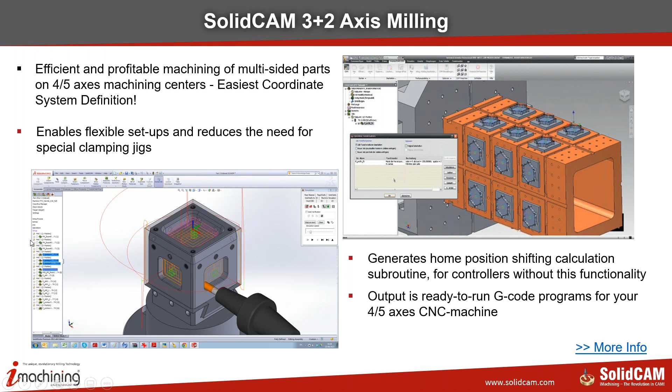So let's look at the first output type, the 3D coordinate rotation.

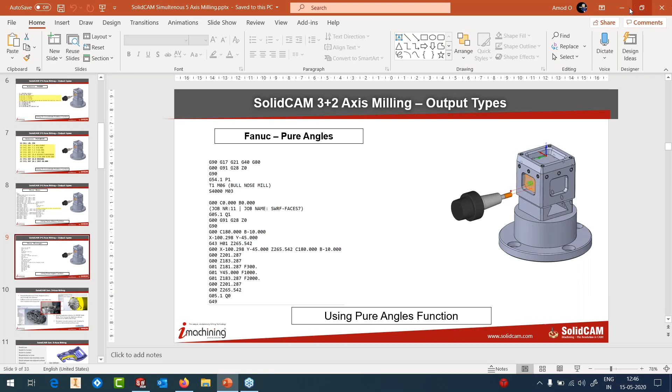So this is a pure angles function. What I will do is move away from my software, from my presentation, and go into the product.

I think I clicked something else and it would come up now. Yes. Let me just let that be there.

So I have a part, and the first function that we're going to see is for Fanuc. I have called in a Mazak Variaxis i500, which is a table kind of machine, and it has got its own Mazatrol control, which is highly compatible with Mitsubishi and Fanuc kind of programming. So it's going to be very similar to Fanuc.

So I would now like to create some programs here, which are basically from different sides, and I would like to post-process and check the output. I'm going to use the same part and show you the difference between moving from Fanuc to Siemens to Heidenhain to macro to pure angles.

And I'll also show you how to check your part program, especially in the pure angles function, where you don't know how the machine is going to move, how to check that right away into your system and confidently give the program down to the machine.

So I'm going to use my drag and drop templates. I have got some facing templates here, and since I would like to do some facing programs, I want to apply some facing templates. So I'll use a simple drag and drop.

I have a 3+2 with a 32 face mill. This program was already done on some other part. I just saved that particular program as a template. I'm just going to drag this and drop it on the face here, and I get the program.

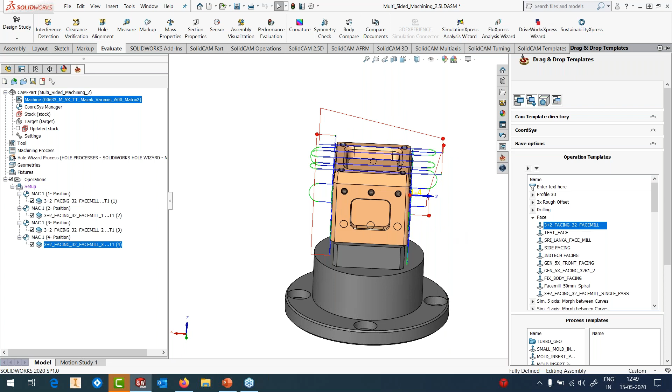Now we'll also look very quickly at some other areas. For example, I want to machine this chamfer. Since I'm using a big tool, I just want a single pass, so I have got another template for single pass. I just drag and drop it on the chamfered face. You can see the coordinate system is already created, and it just creates a single pass to machine the chamfer.

Fair enough. These were to be calculated. Let's calculate.

Okay, so I have my program. If I now output the first program, which is basically nothing but a simple pure 3-axis kind of program where it's not going to do any tilting, you can see that I don't get any G68.2 function because it doesn't need it. It's a simple 3-axis XY plane machining program.

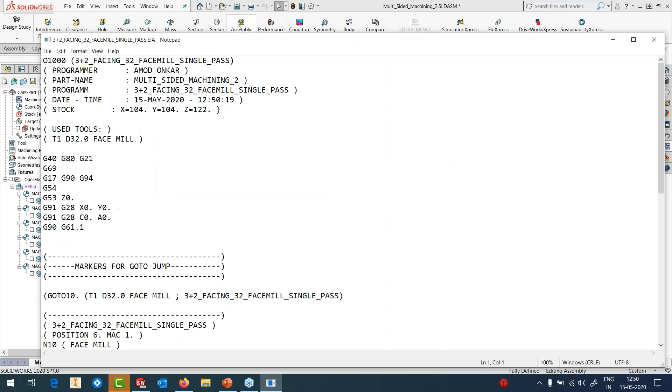But if I take the next one, the single pass program, and generate a G code out of this, you'll see that it outputs the G68.2 function where it'll output P1, Q123, basically the rotation priority: X first, Y next, Z next. Then the X, Y, and Z.

These are basically my coordinate system shifts. How do I get my coordinate system shifts? I simply go into my coordinate system and click on inquire. And if I go into my translation, you can see it is shifting by X minus 54.09, Y 0, and Z minus 38.196. That is the position where the coordinate system is with reference to the main coordinate system. So if I look at the program, I get those 3 coordinates.

So basically, I'm telling Fanuc, or the controller, move first to this position and then rotate around X-axis by minus 80 degrees, Y-axis by 0 degrees, and around Z by 90 degrees. Once it does that, it achieves the position needed to machine it, and then G53.1 will rotate the tables, both in A and C or B and C, whatever those axes are. It will rotate the table and run the program. Okay, fair enough.

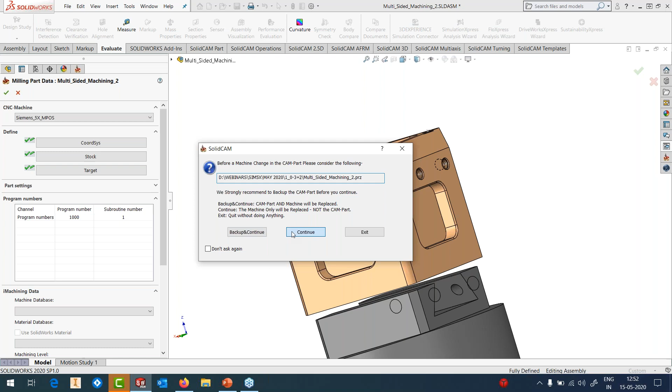Let's change the controller. From Fanuc, I'm going to keep all the programs the same. I'm going to move to Siemens 840D. So I'll go to Siemens. Done. And the same single pass program, I'm going to generate the G code.

So instead of G68.2 or anything else, I'm getting cycle 800. Now cycle 800 has 16 variants, out of which 14 are must-define variants and 2 are optional. You could define them or not, because they can be taken as defaults. And each variant has its own special place. For example, like I said, 54.090 and minus 38.196, you can see those 3 values coming up.

And then we have a number, 27, and we have got 54. So basically these numbers tell you the priority of rotation. If you go to the Siemens manual, you will know that one particular number will be ZYX, another will be XYZ, another will be YXZ. So the priority of rotation is defined by these angles.

Okay, so this is about Siemens. So we get an output like this for Siemens.

Let's go to Heidenhain. I'll change it to Heidenhain. Let's take the DMU 65 monoBLOCK with ITNC 530. Now the window that came up was basically telling me that the cycles between Siemens and Heidenhain are not the same, so please map the cycles.

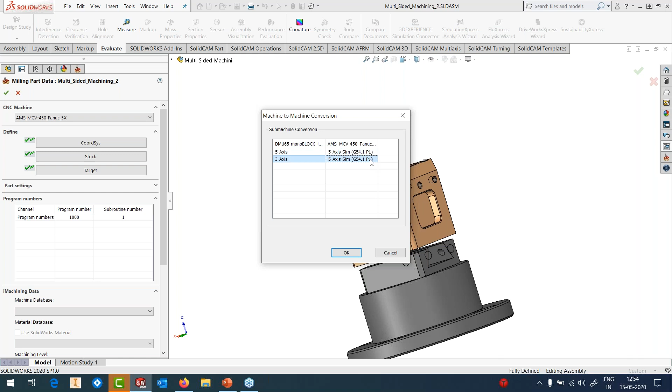So let's look at a macro function. Let's load an AMS machine. This is with Fanuc. Say okay, continue. Okay, 5-axis is basically G54, and this one is G65. So I'm going to change the submachine to indexing.

Before I go into the generation of G code, there are two files that get generated. One is the main file, which has got the program as well as the macro call. The other is basically the macro calculation itself. The macro calculation need not be output every time from the software, because you just take the macro calculation once for that particular machine, put it into the memory of Fanuc, not anywhere else, into the memory. It has to reside into the memory. And once it is inside the memory, you need not output that macro call again and again for different parts. It stays there forever unless you change the machine. Okay, so I'm going to output the macro for the first time.

Okay, and the same single pass program, I'll generate the G code now with a Fanuc output. So you see that you're getting two programs here.

Let me explain these programs to you because they're pretty interesting. First of all, this is my main program, wherein it calls, using the G65 function, it calls P8889. The P8889 is basically the same 8889 macro call calculation. Here I output to the controller the X, Y, Z positions, the changed positions, basically the shift of the origin. And I also output the B and C angles to the controller.

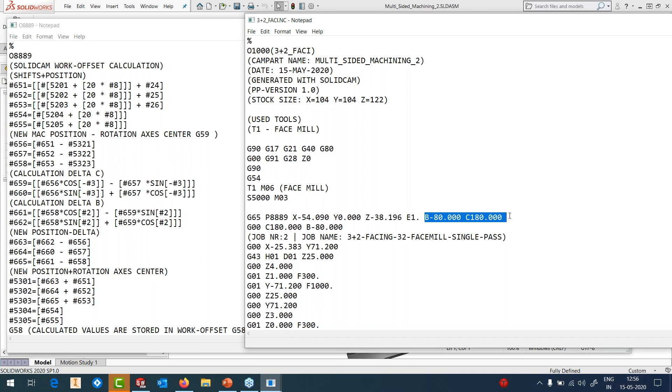But this is not enough. Just shifting the origin and rotating the B and C angles are not enough. I also need to move the origin physically inside the controller. To do that, I use the macro call function. The macro function is basically a combination of several mathematical trigonometric functions, which will use cos and sine methods to generate the new shift and the new coordinate system, which is going to be our new G58, every time we call the program.

So let's close the programs. Let's say 1, 2, and 3. If I output these three programs together and generate the G code, I'll get only one macro call. I don't need that, but here I can see that for the first toolpath there is one macro call. I go down, and for the second toolpath there's another macro call, because here it's going back to the home position, resetting everything, and then recalling the macro again.

Once this program is executed, it again goes back to the home position, resets everything, and calls the macro again for the next program. So every time there is a change in your coordinate or a plane, basically you go from one plane to another, a new macro is called again, and a new G58 is set, and the programs will always be executed from that particular new G58.

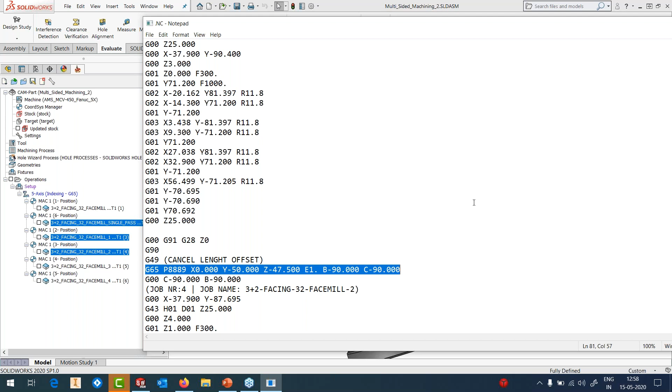But looking at the program, sometimes the operator's eyes will start rolling around because they find it very difficult to comprehend, unless the operator himself has been trained on the macro. They dislike the macro functions. So in such cases, we have to change our programming method, and we need to go into what we call the pure angle method.

So I simply switch the sub machine inside the machine itself, and I go from a macro method to a pure angles method. Now what I'm going to do is I have entered the part position. So I have got my G54 here, and my G54.1 P1 will be exactly at the center of this bore, because that's the mating part on my table.

Okay, so I go to the machine, I set G54.1, I mount the fixture and the part, set my G54, and I get two coordinates, XYZ, XYZ. And I do a subtraction, and I find the difference between G54 and G54.1, both in X, Y, and Z. And those values I come back into SolidCAM and enter here.

Because remember, the controller is not going to do any kind of calculations. The calculations will happen by SolidCAM. So I bring the values, I put the values here. If you want, you can just look at where the part is going to be stationed at. Not in this case.

Once these values are done, say okay, let's generate the G code. Now this is going to be generated not with reference to G54 — sorry, macro is not needed here — but it is going to be called with reference to G54.1 P1. So all my coordinates are now going to come with G54.1 P1.

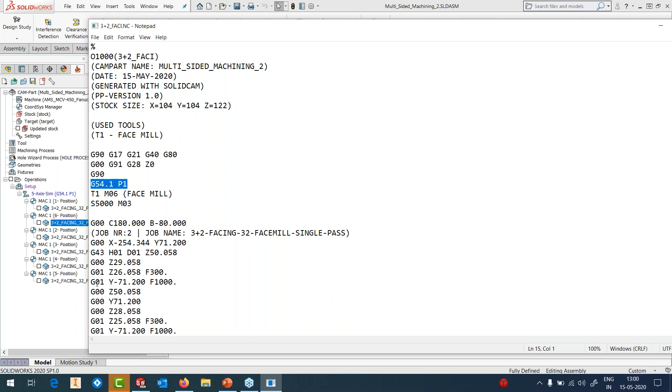So you can look at the values. The values look crazy, but the operator can visualize it very easily. So what we will now do is we'll go into the machine simulation and we'll check if our G code with respect to the machine is okay or not. You don't even need to go take it to the machine and then get some surprises. It's not needed. You can check it 100% here itself.

Now, before we take it into the machine simulation, I would like to note down one value here. Go to the tool, and I will note down my gauge length, which is basically the tool gauge length, 122. Okay, so let's go into the machine simulation.

This is on an AMS machine, and you can see that it's ready. If I run the simulation, this is how it's going to run - one pass, second pass, done.

Okay, so let's go back. Now we are ready here. Let me look on the side here. I get a coordinate of X, Y, and Z, the B angle, the C angle, and the B angle. Now this X, Y, and Z are basically the machine coordinates, not the coordinates coming from G54, but these are machine values.

So I now need to verify if these machine values are the same as my G code values. What is my X value here? It's minus 254.344. My Y value is 71.20. First, let's check if we are getting the two X and Y values same - okay, so we have minus 254.344 and Y 71.200. I can now be 100% sure that my X and Y values are absolutely right. It's going to come to that position.

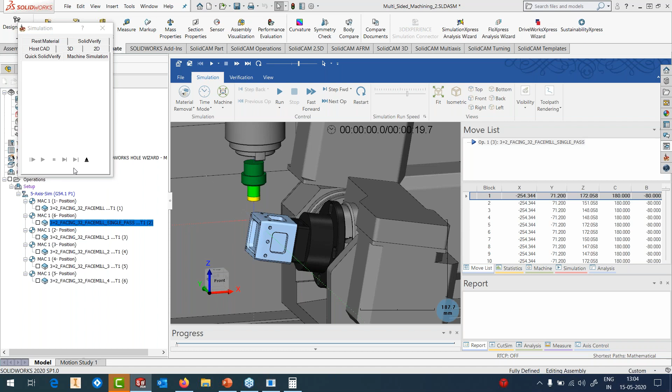We have got a special training course only for this 3+2, especially for pure angles. Someday we could have just a session for this particular topic, because it's pretty interesting. There are several machines today in India that do not have the 3D coordinate rotation functions, neither do they use the macros, so the only way we go here is with the pure angle method. Many of my customers are using this method successfully. They don't look left, right - they just take the program down on the machine and run it.

Right, so that was about 3+2. We saw some 3D coordinate rotation functions, the macro function, and the pure angle functions, including checking the machine. Let's get back to our presentation and move ahead. We're now moving into simultaneous 5-axis, which is basically the generic functions. It's a very powerful simultaneous 5-axis system that generates very powerful simultaneous 5-axis toolpaths with a very user-friendly interface.

You'll see that it's very, very easy. Collision check and avoidance for tool holder and other machine tool components are provided within the software. Apart from that, we have specific application solutions for swarf, multi-blade port, contour, multi-axis drilling, conversion of 3-axis to 5-axis, etc. And we can simulate the entire machine tool, including the material removal simulation, showing both the rotational and linear axis.

Now, one word about generic 5-axis - generic 5-axis is a vast system. You will see that it's a very vast system, and there are no parts that cannot be done on generic 5-axis. Everything is possible. Only thing, because it's not an automated function, it could take some time to get adapted to a new part.

But apart from that, it can machine any part, whether it's a port, whether it's an impeller, whether it's a blade, whether it's a part, whether it's a drill, anything. You throw anything at the generic 5-axis and it could do it very efficiently. Okay. Generic 5-axis basically has 3 components to it.

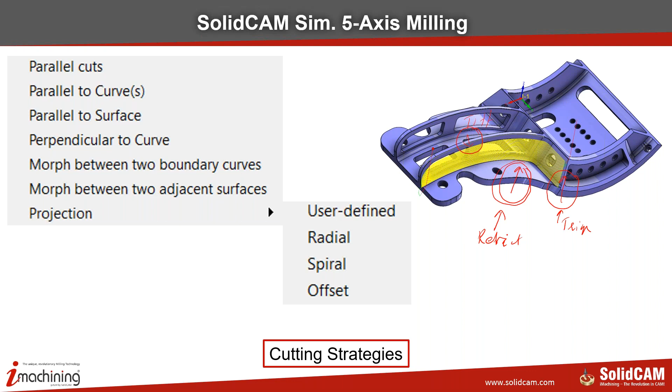For example, for this particular surface group, I could say just tilt the tool. To this particular group of surfaces, I could say just trim the tool path, trim the collisions. And to this particular group of surfaces, I could say retract the tool up. So in just one small part, I have now defined 3 reactions, okay? It's not just, you select a surface and say gouge check. The software needs to know what to do if it finds a collision. That's what we call reactions. Tilting to one group, trimming of the tool path to the other group, and retracting from another group. So you can put in SolidCAM 4 such groups of surfaces and 4 reactions to these surfaces.

So our way of working in SolidCAM is that we first define the strategy, we define the tool axis control, we define the gouge check, and we calculate the tool path. So this is a simple streamline. Now, this is a flow of the way we generate the tool path.

Like I said, generic 5-axis is very vast, and so is the support of the tools that we have. We've got end mills support, bull nose, ball nose, face mills, dovetail mills, taper mills, flat taper mills, taper ball nose, slot mills, lollipop, and the new generation tools like barrels, oval form, lens form, and taper barrel or taper form tool path tools.

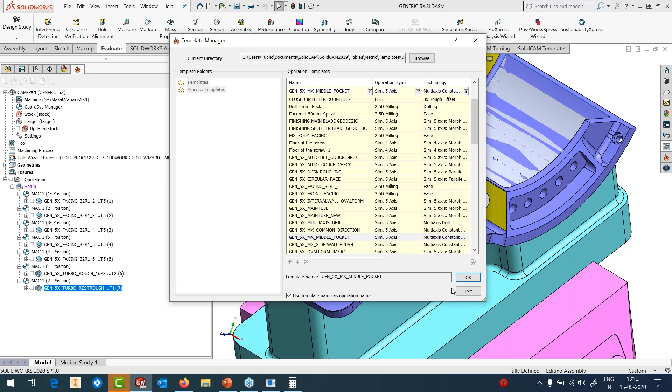The first one I would like to look at is machining the inside walls, which is pretty straightforward. So what I'll do is add from a template. Even here I've selected and kept a lot of templates. Let's see, that's the middle pocket, and I'll save the template.

So what I'm using here is a strategy called MultiAxis constant step over, which generates constant step over irrespective of how the surface is. Not by looking from one particular direction, but generating a constant step over looking normal to the surface at every given point. So in the geometry, I need to pick surfaces.

So I'll pick my surface. I'll pick this one, this one, this one, this one, and this one. These are the 5 surfaces that I picked. Now notice that these surfaces have cutouts in between. So I'll also show you how we handle these cutouts very easily.

And I'm going to use parallel to curve. So I'm going to use that curve at the bottom. Yep, that's the curve I'll use. And the tool I'm using here is a 10 diameter ball nose.

And in the tool axis control, I have defined a tilt of 80 degrees. That means it's going to tilt 10 degrees away from the surface. It's needed because I don't want it to touch the entire flute onto the tool. That could also be a method of doing it, but that's a different method. I'm going to give a tilt of 10 degrees basically to the vertical, so I've defined 80 degrees to the horizontal.

And in my geometry here, in the surface, I have asked the software to fill the holes. So if there are holes within the surface, they will be filled up and it will be machined. Okay, so let's save this toolpath.

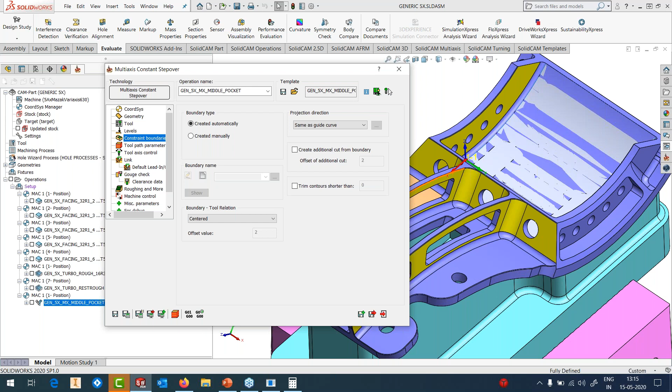Most of the calculations inside SolidCAM in 5-axis are not lengthy calculations unless we used a specific calculation routine. Most of them vary anywhere between 15 seconds to 35 to 40 seconds of calculation time. So they're pretty quick. So if you look at the toolpath, okay, so we have a problem now.

You can see that the toolpath has been done very funnily. That's because of my tool axis control. Instead of plus 80, now it's coming down from the bottom side—since I've just defined surface, it can approach from any side because it's 5-axis. So I'll say minus 80, and I'll hit calculation.

Again, like I said, most of the calculations inside SolidCAM are not more than 15 to 40 seconds. Okay, so we've done a pretty neat calculation. You can look at the toolpath, very clean. And most important, you can see that it covered the surfaces. It covered the holes that were there in the surface and just bypassed them, moved over them as if there was a surface over them.

If I look at the simulation now here, simple insight within the software—let's run the simulation. And if I look now at the machine simulation, if I take it to the machine simulation, okay, I've loaded it on a Mazak. And that's my part with the fixture on the table. And if I switch on the toolpath, that's the toolpath.

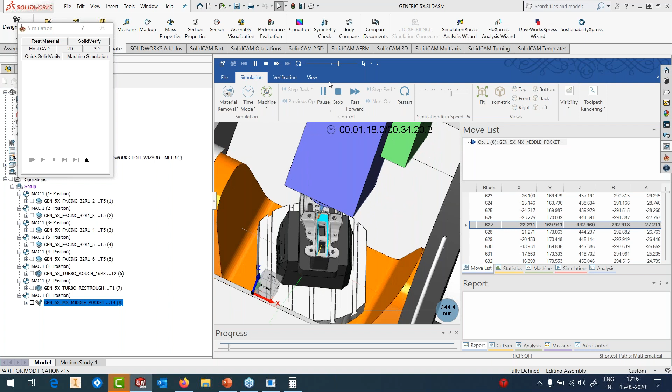Start. That's how it will machine it. Okay, so it's pretty clean, pretty fast generation, and most important, the toolpath quality is extremely high. Okay, fair enough. This was one toolpath.

Let's also now generate the toolpath for one of the side surfaces and look how it machines. So I'll again add from the template the sidewall finish. Okay, I'll select the faces a bit later. Once I add the template, let me move to my surfaces, and I'll pick my surface here, and the drive curve is there. That's the drive curve. Okay, this is done.

The tool is, again, 10 diameter in this case. Tool axis control, won't use minus, it's going to be plus here. Well, that's it. And in the gouge check, I'm going to enable only with the tool shaft and the cutting portion. It needs to check for these surfaces that I just picked. And the strategy here I'm going to use is Retract Tool along tool axis. Perfect. Let's hit the calculation. Like I said again, calculation time isn't too much.

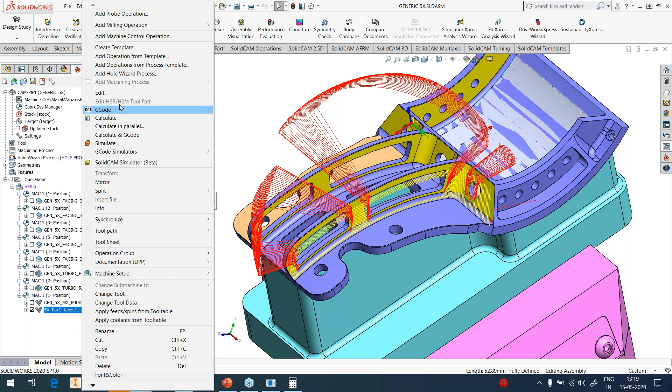You can see there are so many red patches. Okay, that's pretty much expected because it found holes and it doesn't know what to do with the holes. Because when I go into my links, the holes are simply meant to be retracted to the clearance plane. So if there's a gap more than 20% of the size of the diameter of the tool, it should retract to the clearance plane. I don't want to do that. I just want to apply a blend spline. Okay, don't go to the clearance plane, but just blend between the 2 positions. Let's hit the calculate button. Done. And you can see that I fixed that area.

Right. Now we have a problem here of retracts going too much at the end. That's because, again, if I go into my links, you see that when it is connecting 2 slices, anything more than 110% of the side step, it will take it to the clearance plane. I don't want that. I will just change the value to 500. And the ones that are being directly connected, just straight connections, I would like to change them to spline so that there are very smooth connections on the slices. Okay, so that's also fixed.

You can see how easy it is to fix issues once you see them in SolidCAM. Okay, so we fixed the issue of the gaps that were there. We fixed also the issue of these sharp corners, sharp motions. I now generated a smooth motion. Okay, so we machined this particular face. Now we have to machine the fillet. That also is pretty simple. Now to do that, I'll have to use a different kind of technique. And this is a technique where we use the functions of SolidWorks.

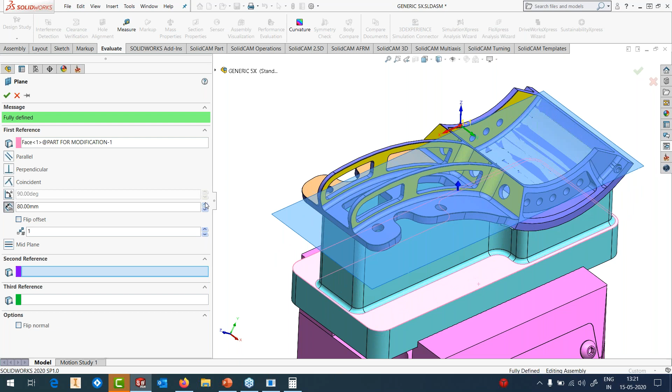So I'm going to make a plane here because I just want to make a sketch. Okay, that's good enough. And 80 is good enough. And we'll make a sketch here. Let's go to the top view. And I will simply make 2 lines. 1 line here. And 1 more line here. Now to make the line exactly the same, I'll drop another construction line here. This is only going to be used for construction, and I'll trim off the excess.

And I'll apply a fillet here, 10 millimeters. It's good enough. So I've got a curve. This curve should be good enough for me. So I made a sketch of a simple curve. Now I'm going to add simultaneous 5-axis again into the generic. Let's go to the geometry. I'll pick the geometry. These are the fillets that I need to machine. And okay, it's morphed between two curves.

Let's go to the start. That's my first curve, and my next curve is here. That's all - so I have two curves, start and end, and I'm going to use a taper ball nose in this case because I would like to machine it.

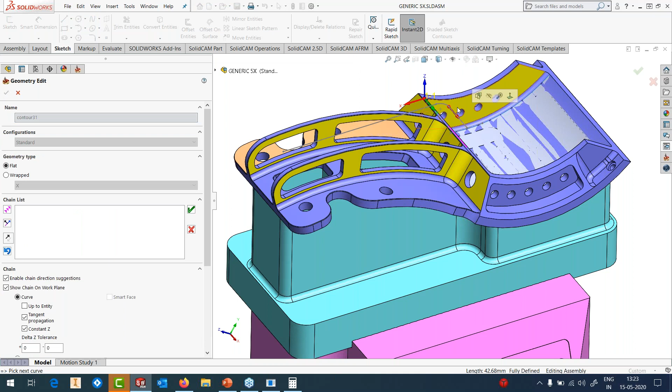Like I said, we have got tons of methods. So we will say tilted through curve, and the curve that we're going to pick is the one that I just defined using the sketch - this one here. So I picked this curve. That's the curve that I'm going to ask my software to follow whenever it's cutting the surface below.

Okay, perfect, so we have almost done that. Let's save and hit the calculate button. Again, this is going to be a pretty quick calculation. Okay, calculation done - we have got a lot of retracts.

We don't need that, so let's edit this toolpath, go to the links. Of course, we can always fix it, but I just want to show you that you can always go back and change this value. We could always have set this value straight away in the toolpath itself.

Okay, that's done. So if I now run the simulation of this, I'm machining only the fillets. You can see it's clearing that surface, machining the fillet, and the tool axis is always passing through this particular curve that we selected. So we used a tool axis, a tool curve function. The curve was selected, and the tool axis now is always passing only through that curve.

So, like I said, in SolidCAM, in the generic, you have got tons of methods in which we can machine a part the way we want it, not the way the software is going to give us, but the way we want it to machine.

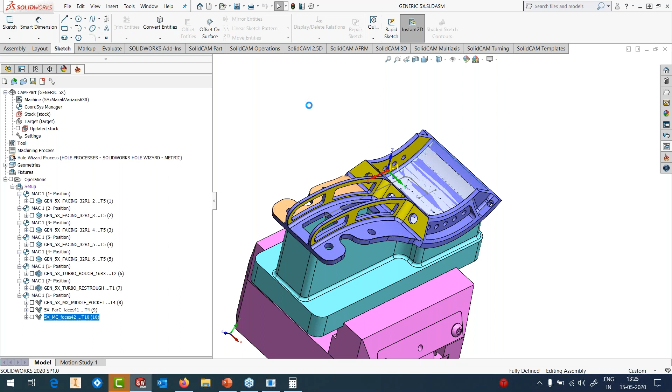Right, so let's pick another part. I'm going to take another part and show you the generic 5-axis machining functionality. And this time it's going to be a turbine blade. I've got a pretty - it's not a simple turbine blade, by the way. It's a complex turbine blade.

We've got features on either side, fillets on either side, and surfaces on either side. We would not like to see the roughing, because most of the time the turbine blade roughing is done using 3+2 - that's simple 3-axis roughing, with positioning in the other 2 axes. We would like to see the finishing.

Okay, so again here I have got templates. So I'm going to add operation from a template, and I've got turbine blade, main finishing toolpath. I'll apply it - it's purely parameters, nothing else.

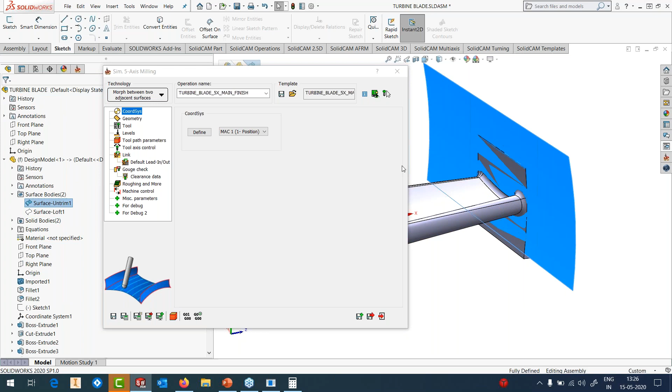The geometry I'll have to select. Now what I've done here is, just for the sake of clarity, I've untrimmed this face. I'm just going to use this face to define the pattern, nothing else.

Okay, my drive surface is going to be these surfaces. I'm not going to select the fillets - the fillets will be machined separately along with the wall. Okay, so these are my drive surfaces. That's done.

My start edge - that's why I brought the surface out from the hidden side. So this is my start surface, and this is my end surface. Okay, the pattern is now going to be between these 2 surfaces.

Okay, the tool here I'm using is a taper ball nose. Many people would immediately jump on this and say, oh no, for turbine blades you must use bull nose. I'm going to come to bull nose also, but I would like to show you the power of SolidCAM, in which it can just switch over between tools and give you an excellent toolpath straight away.

Okay, so in the toolpath parameters, everything is done. Only thing now, the function of that face is over - I'm going to switch it off, and let's go to the gouge check.

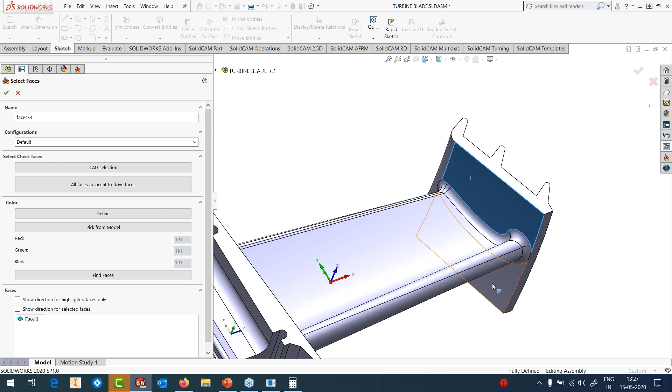And here I'm going to enable the check surface. Basically, the check surfaces are these surfaces where I would like the tool and the holder also to tilt if they get too close, or if they get precariously close to these surfaces.

Okay, this is done. And the second gouge check that I've put is for the drive surface, wherein I've said retract the tool along the tool axis if you find any collision with the drive surface. With the first gouge check, I said tilt; second, retract. Okay, that's all that's needed.

And let's hit the calculate button. Again, it's not going to take more than 30 to 40 seconds to calculate this.

Remember, this is a time-tested template, so you can use it for any kind of turbine blade that you have. Just take a template, apply it, and your calculations will be done.

Like I said, any tool path takes not more than 30, 40 seconds. Okay, that's the tool path here. Pretty clean. Look at the tool path. It's a pretty clean tool path that you have in SolidCAM.

Okay, let's look how this looks on the machine. So here I have a DMG DMU 100 monoblock, and this monoblock machine is different. It has a head motion, and it also has a table motion, but the table is mounted horizontally, not vertically. So this is the part mounted on the table with the tool, everything, and we can start the cutting motion.

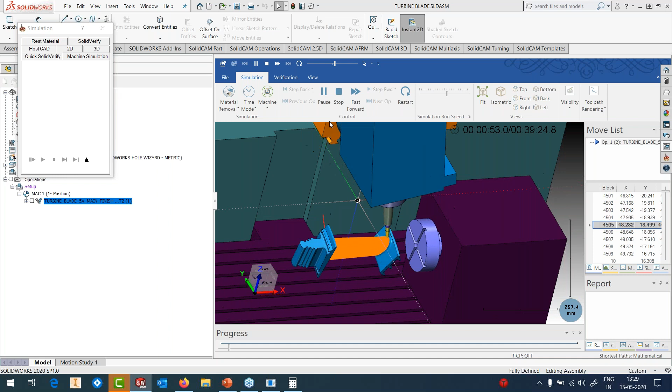Smooth motions without any collisions. Okay, so it will just keep rolling around and keep machining it like it has to with a turbine function. There's no point in looking at the simulation till the end, because honestly, I find it boring after some time. What we need to check is only the first and the last motions. Once they are okay, everything else in between is fine.

Like I said, some people would have jumped up and said, nobody uses ball nose for finishing your part. How would you do it with a bull nose? Fair enough. So let's again bring a template. I've saved a template with a bull nose. I'll apply that.

And again, I can reuse the geometry, but I don't want to do that. I'm going to define fresh new geometry here. My drive geometry is this. Like I said, please don't look at the fillets because we are not going to do the fillets now. Fillets will be the next step. So these are my drive surfaces again. And my start edge surface is that one. And my end edge surface here is this one here. Okay, again, this work is over.

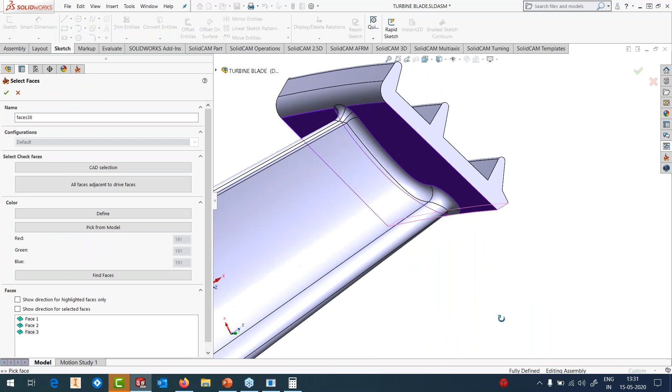I'll say bye-bye to him. And in the gouge check, we will use again the check surface, which is basically 1, 2, 3. I also would like to pick all these surfaces because these surfaces are going to be precariously close to my holder, not to my tool, but to my holder and the surface here.

Okay, done. Now, the only thing I've changed in the tool axis control, the other one was always normal, looking normal to the surface. But here I have applied a lag angle of 30 degrees to this particular operation. I'll tell you why I have applied a lag angle, okay? And this is very important when you're using a bullnose tool. So let me save this. And let's calculate this tool path.

Somebody is asking me if we have to make each machine in 3D before creating the program. No, these machines are supplied to you as part of the software. When you order the software, you have to tell us which machines you have. We build those machines for you, and it's only done once. When you call the post processor, the machine comes along with it, so you don't need to keep redoing it. It's only done once when we install the software for the very first time on your computer, not when you do the programming. Okay, it's just once, right?

So we have done our calculation. Now with a bull nose, what was the tool I used here? I used a 16 with a corner radius 3. So I'm using an inserted kind of a cutter with bull nose 16R3.

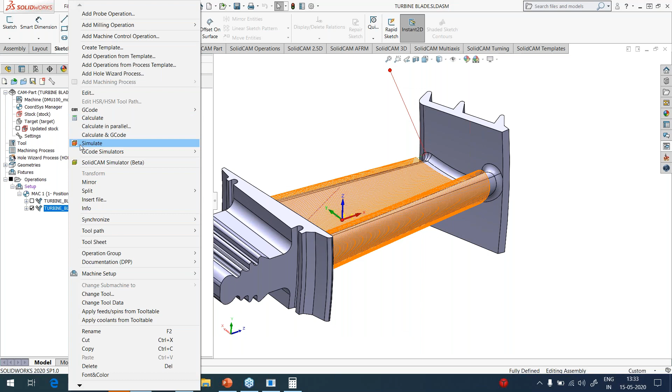Let's run the simulation in the machine, because I would like to explain to you what happens when I provide the lag angle of 30 degrees. Now, why people don't like to use ball nose tools for finishing, especially on turbine blades, is that most of the times the tip of the tool is in contact with the surface. And we know that when the tip is in contact, the RPM is close to 0, or even when the other small portion is in contact, the RPM is very low there. So the quality of surface that comes is not very good with a ball nose tool. However, it's not the case with bull nose. Now, why I have given the lag angle, I'll explain to you when it comes onto the surface here.

Okay, that's a bull nose. I'm going to stop it here, switch off the tool path, and let's look at the contact of the bull nose. You can see where it's making contact, on the front of the tool. If I had not given the lag angle, the contact would have happened at the center of the tool, which is not the right place to be using for a bull nose tool.

Especially if you're cutting in a concave kind of area, you should never use the center portion of the tool. Here we're using the front of the tool, always in contact. Whenever it is cutting, only the front of the tool is in contact with the part.

The advantage here is that you get the full diameter contact area, you get the entire RPM. So you get much better cutting, much better surface quality, and you can cut much faster.

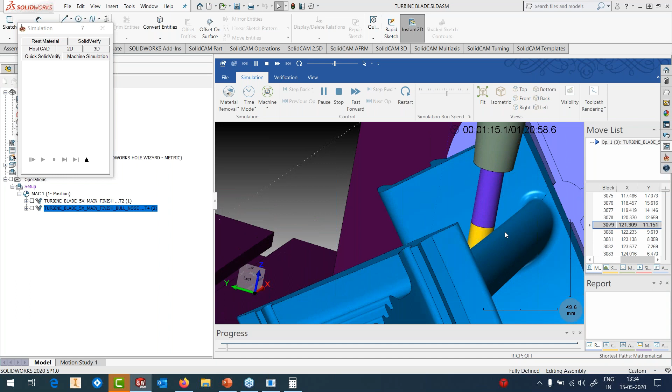Remember, with a taper ball nose, it's not possible to go with a bigger step over. With a bull nose, you can actually go with a bigger step over and yet generate a similar surface quality that you would have generated with a ball nose with a small step over.

Somebody is asking that lens tools are very good for such functions. Yes, we will come to the lens tools when I show you the circle end mills in approximately five minutes from now. Okay, this is about bull nose. It'll keep continuing and machining it.

Let's now look and quickly generate for one of the sides, for one of the fillets, we will generate the program, because the other side is very similar. So I'll again add the operation from the template, and this time I've got a turbine blade finish, fillet finish. I'll add it.

Here, of course, we cannot use bull nose. We can at most use a ball nose or a taper ball nose. So I'm using a taper ball nose with diameter 16 and tip radius 3R.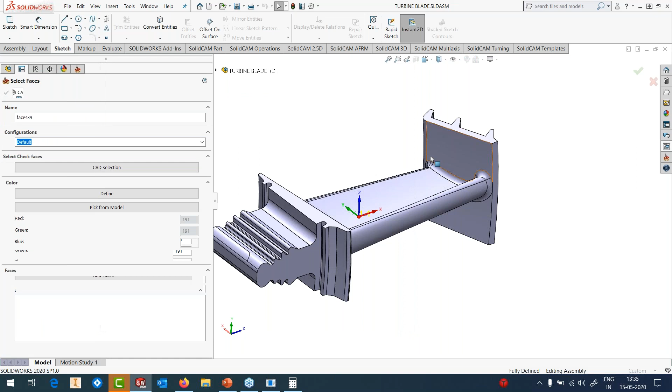Geometry, of course, is going to be -- because I'm going to take some portion of the tool path also onto this, so that I don't get any mismatch between the bull nose generated tool path and this one. There has to be some kind of an overlap.

So I'm going to pick the surfaces. Okay, that's done. And the edge curve, it's basically this one, like that, here. It's going to go parallel to the curve. Oops, no. That one, here, yeah, okay, that's done.

I don't need to do anything much, but I'll just go to gouge check, and I'm retracting the tool if it finds collision on the drive surface, also the check surface. What is my check surface? My check surface are these three surfaces, because the fillet is in contact and it could come very close to the surface.

Okay, let's save it and hit the calculate button. There's nothing else. I have saved.

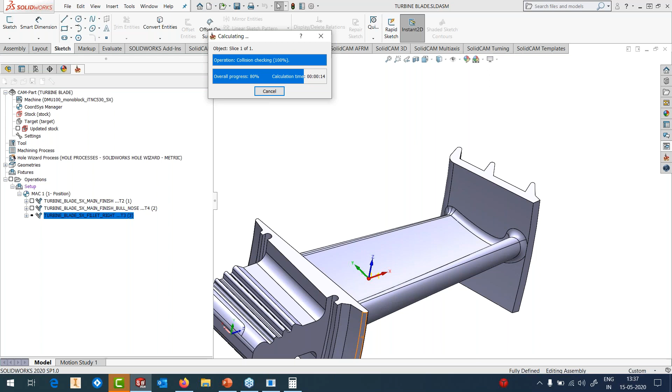The most important part is the creating of proper templates. By creating templates, you actually end up standardizing your toolpath generation. So a senior most person can put all his experience generated over the last several years into effective templates, and the engineers below him only have to just apply the template and select the right geometry.

Okay, the toolpath is done. Again, looks nice and clean. If you look at the simulation this time, what I've done -- you can see here, I'm using a 4+1.

I have locked my -- if I show you the toolpath parameters, the tool axis, you can see it's the 4th axis. That means I'm going to have simultaneous 4th axis motion, and the 5th axis is locked at -30 degrees. So that's not going to change. The 5th axis is locked.

I'll just right click on this. Let's go into the simulation of the machine.

Michael, you're asking whether templates can be made as a part of the standard installation. That's a good suggestion, it can be made. I can provide all the templates that I've generated over the last few years, and this could be a part of our installation. Thank you very much for the suggestion.

Let's run the simulation, and you can see here what is happening. If I go into the front view, my head is locked at 30 degrees.

So if I look at the side bar here and look at the B angle, you can see the B angle is set at -30. It's not changing from -30. The only thing that are moving are the X, Y, Z, and the A axis. By doing this, it's actually going to machine a portion of the top flat surface and also the fillets.

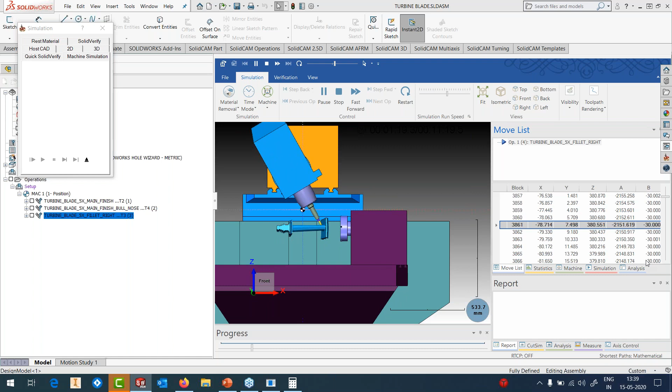I've got templates also to machine the left side of the fillet, and templates to machine the face of the turbine blade. I created these templates over the last year for the turbine. I would not call it several years, but I did apply it to at least 3 or 4 different types of geometries, and they work very well. It might need a little bit of tinkering here and there, especially on real complex geometries, but otherwise they work perfectly fine.

That's about the turbine. We moved from a simple geometry into turbine, which is a complex geometry. We'll move to an even more complex geometry. When I look at the generic 5-axis, for me the most complex part is going to be this, because honestly, nothing is visible. Everything is hidden inside. So we have what we call a closed impeller.

We are going to machine the closed impeller. I already have done it, because for people who would like to know how this part was actually done from scratch, right from importing the part into the software till the end, please go to our webinar section on solidcam.com. Hopefully you should be registered there to look at this webinar, and there you have a webinar of almost 2 hours only for this part, where I have taken this part and imported it via Parasolid.

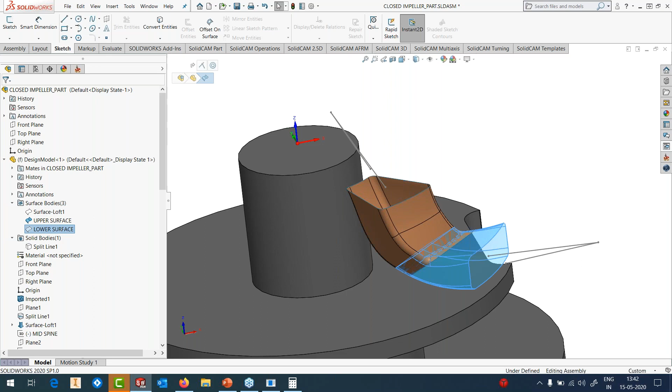This portion we are going to machine from one side, and the other side, which basically overlaps sufficiently, I call the lower side. You can see that it overlaps almost 10-15 millimeters into the upper surface. So I created this surface, and these I called the lower surfaces, and I'm going to machine it in a different direction. Then I created another toolpath which basically overlaps between these 2 toolpaths, one coming from the top, one coming from the side. It just overlaps to make sure there are no mismatch marks between these 2 toolpaths.

So this is all I've done with this particular part. But like I said, this entire exercise of creating this is approximately 2 hours, so I can't spend 2 hours today because we have a lot to cover. What I have here is the upper surface. If I go into my first toolpath here, I'll quickly show you what items I've selected.

It's morph between two boundary curves, and these are the surfaces that I've selected as part of my machining surfaces. My upper curve is my start curve for pattern generation, my lower curve for pattern generation, and then I have the tool axis control, which is basically a tilt curve. These tilt curves were created using some functions - why they were created like this is available in my webinar from a few weeks ago. This is the tilt curve I've used to control the tool axis, and some gouge check faces that I selected.

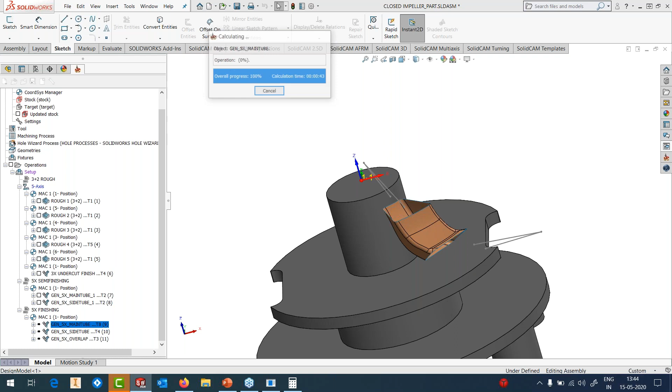Apart from that, everything else is only applying the final collision checks, and like I said, not more than 30 to 40 seconds, we have the toolpath. So we have a very nice toolpath in the area.

Let's run the simulation in machine. This time I have a DMU 65 monoblock. This part is quite big, approximately 300 plus in diameter.

Okay, so this is the part and the toolpath. Toolpath is not visible — I can make it visible, but I don't want to do that. Let's start.

That's how it will start machining. Let's increase the speed. I've used a lollipop tool to cut this part, and this will just keep circling, spiraling till it reaches the end of the surface. This is how the motions of the table are also going to be.

So this is how you could also use generic 5-axis to do parts like these. Again, I have got templates. Michael, thank you very much for this suggestion. We're going to make this a part of our software.

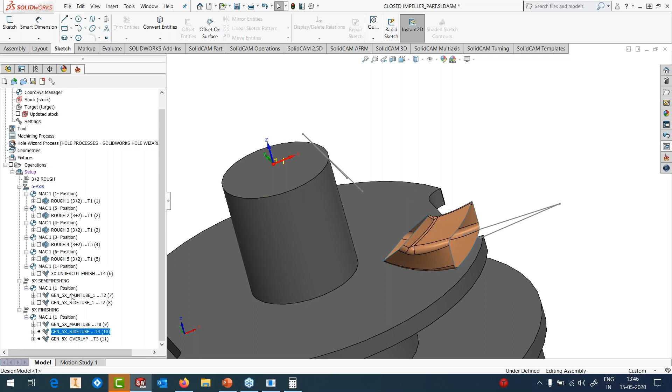The next one I did was to switch off this surface and switch on my lower surfaces, and we'll calculate the second toolpath here.

Again, I'm using a lollipop tool. Again, here it should not take more than 30 to 45 seconds to calculate. Most of the calculations here are done live, okay?

I've not saved anything in this. The only reason I wanted to do this live is the amount of time that is needed, because otherwise this part can easily take 2 hours.

You can see the webinar that I've done. It's done live, start to end, for this particular part — importing it till the final finishing.

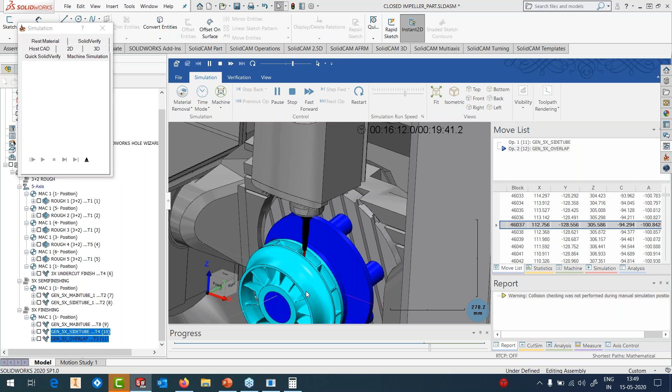Now let's look at the overlap, because it's very interesting. Since it's doing the machining quite inside, you'll see that the holder is also entering into the part. The auto tilt function, the auto gouge-check tilting function, is so powerful that it can even take into account your holder and make sure it's not colliding when it's doing the machining, even when the holder itself is inside the geometry.

Now it's actually doing the fillet, the merging fillets between those two areas. It's quite a steep fillet that we have, and that's how it machines the fillet — no collisions, nothing, straight away the toolpath comes up. Again, this was part of our template.

So, coming to the end of the generic functions — you can use generic to machine any kind of part in any way you want, whether it's a turbine, simple blade, simple parts, or even a part as complex as a closed impeller. Let's jump to our next area, and that's another 10 minutes.

And here I'm going to talk about the circle end mill support.

The circle end mills are basically the new generation tools that have been released by several tool manufacturers in the world. Okay, now inside SolidCAM we support the 4 major shapes. The 5th one is coming. The first one is a barrel shape, where you have got a very large radius on the side, on the flank, and the bottom is flat.

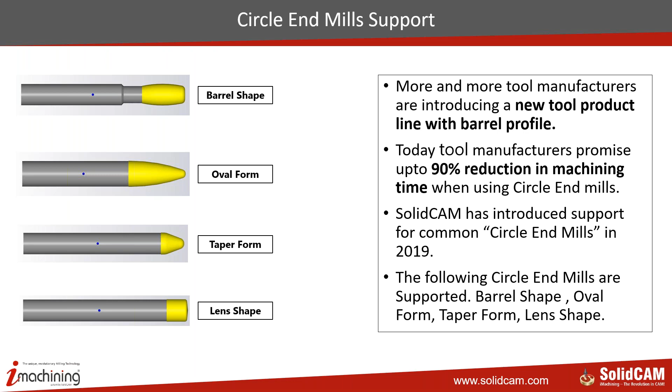The advantage of going with the circle end mills is that with a very large step over, because of the very large radius, we can achieve a scallop much smaller than what we would achieve with a ball nose tool with a very small step over. Clear-cut example is on a straight wall, where you could have an AP or depth of cut of 0.5 and generate an RA of 1.22, whereas with a circle end mill, the same RA or even less than that can be generated by 3 times the step over. That is because of that large radius that exists on the flank of the tool. Thereby, you actually end up reducing your machining time.

There are other compelling reasons why you use the circle end mills, and one of them is basically deflections. If you have deep parts, and if you're using, let's say, a flat end mill, it can start deflecting if the L/D ratio goes beyond a certain value. And instead of getting a straight flat surface, you will end up getting cusps on those surfaces. Whereas with a barrel mill, because it has a radius on the side, even if it deflects, it will always be deflecting on that large radius. So it doesn't affect the scallop. So it becomes a much more robust cutting in cases where you have these deflections.

Okay, so the benefits are, first of all, you get very low cusp heights, you can balance machine inaccuracies, there is a smooth transition between cuts because of that large radius, and low dynamic disturbances due to short tools. Most of the circle end mills are not long. You'll see that, for example, a 16 millimeter or a 12 millimeter circle end mill, the entire length of the tool won't be beyond 70 to 80 millimeters. Okay, so out of holder is less. And I'll tell you why we need so little and how we can work with such a small OHL of the tool.

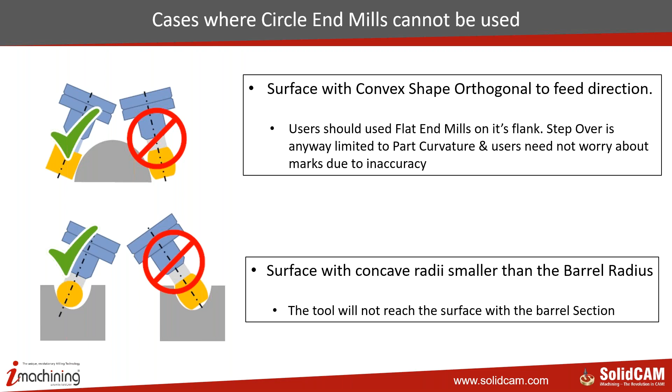Another very important area where barrel tools cannot be used is if your machine itself is 3-axis, because barrel tools are effective only when you can tilt. And if you cannot tilt your spindle, you cannot tilt the tool, you effectively cannot use the benefits that they offer. So basically, these tools are a big no-no on a 3-axis machine.

Another area where it's a challenge with the barrel tool is when your surface itself has too many variations inside it. If it's not a single free-flowing surface, if it has some different shapes in between, then the challenge comes up on how we are going to program, because we are going to need two different programs. One machining the large surface with a bigger step over, the other one machining the inside one, which is not the same shape, with a smaller step over.

Barrel tools, if you look at the catalogs of all the tool manufacturers, they say very clearly that these tools can be used only for finishing. They cannot be used for roughing. They cannot really be used for semi-finishing. And at the most, material they can remove is between 0.2 to 0.3 millimeters, or at the most, they can go to 0.5.

So it's very important that your priority of machining the surfaces is very right. You can't directly go and machine the fillets first without finishing the flank, because then your fillet area, the weakest point on the barrel tool, the bottom area, is going to get a lot of load, and that's going to wear out very quickly. So you have to be very particular on which area to machine first, which area to machine next, especially with barrel tools.

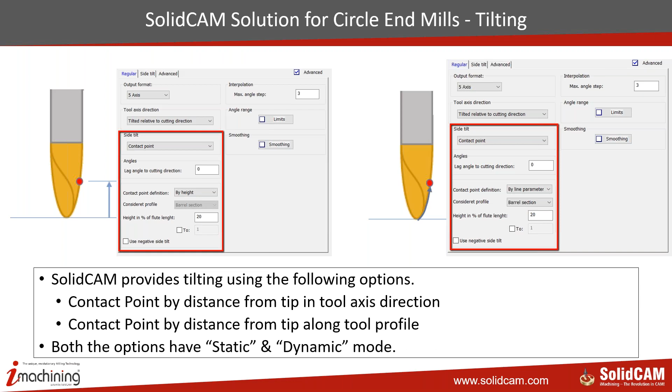SolidCAM offers a completely different solution for tilting. We can define which point of the tool will be in contact with the surface. This point can be defined by a percentage, or it could be defined as a distance from the tip, or it could be defined as a percentage distributed over the barrel profile. And the point can be a static point, the same point throughout, or it could be dynamic.

You can start at 50% and you can go up to 15% of the barrel profile, and the tilting will automatically adjust accordingly. Right, let's look quickly at a part with the barrel tool.

Somebody asked me if SolidCAM can help you in selecting the right tool. Well, you select a tool and it'll tell you what result you're going to get with that.

So I have this tool, I have the part here, and I have a surface which has a very large radius. It's obvious that if I use a ball nose, I would need a very fine step over to machine the surface. If I use an end mill, I would not machine the surface beyond a certain length. After that, your holder comes into play, and that's the end of toolpath generation.

So what I've done here is I have created a tool, which is an oval form tool, with diameter 16, a tip radius of 3, and the profile radius, the large radius, is 75. So if I go into my tool definition, you've got barrel shape, oval form, lens shape, and taper form. I've selected the oval form with diameter 16, tip radius 3, and the large radius 75.

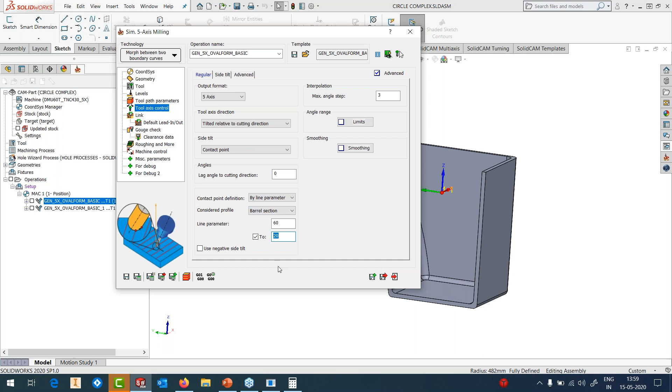And in the tool axis control, what I've said is that my first point of contact should be at 60% of the barrel profile, and my last point of contact should be at 20% of the barrel profile. I have not defined any angle here. The angle is going to be generated by these contact points on the barrel profile.

Okay, so let's look at the simulation, but it's not possible that my entire path would come exactly at 20%. It can stop, because at 20% it would actually create collisions with these two surfaces. And I've put these collisions as a collision check.

I've put the bottom two surfaces as collision check. Right? So it might not go all the way up to 20%. It can stop at 28% because of the collision check. So let's look at the simulation on how the toolpath looks like. By the way, this toolpath generation did not take me more than 10-15 seconds. I could have generated, but let's do it quickly.

So where is my first contact point? So I'll take my tool. It's entering into the geometry, and once it has made a contact with the surface, let's zoom in, and you can see that my first contact point is at 60% of the barrel profile. Okay, I did not define what should be my tilt angle. My first point is here, and as the tool moves over this particular surface, it will keep changing the contact point. So let's reduce the speed and play.

You can see that it's now changing the contact point, and as the contact point is changing, it's also changing its tilt. That's why we can use really short tools in barrel, in the oval form kind of a profile, and, sorry. That's why you can use really a short tool, and you can actually really go and machine pretty deep areas if the surface allows you.

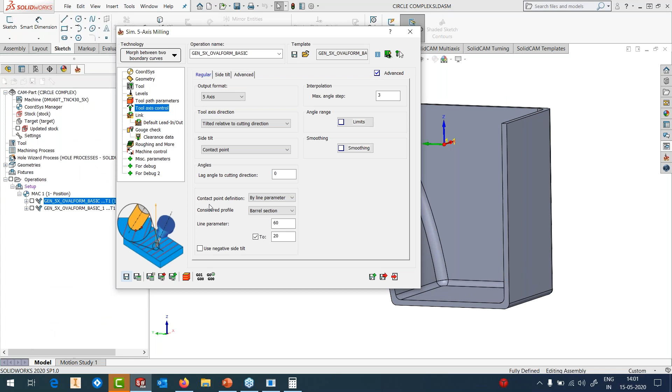Okay. So this is how it's actually going to distribute itself over the entire profile. So if you look at the toolpath, it goes right way up to here. So here it will not be exactly 20%. It might be probably 28% because it stopped, because it was going to generate a collision with the surface. Okay. Let's see that. Let's run the simulation again.

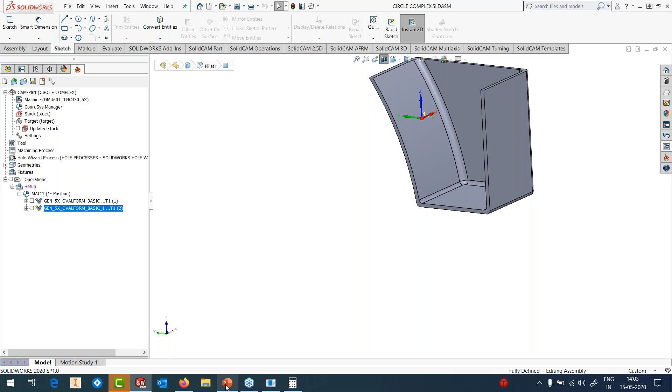Okay? So you can use these tools, reduce your machining time, machine almost any kind of geometry, apart from the ones that I just said, they are big challenges for us. Okay, so let's move ahead from our generic. Let's move into the application-based strategies, which will be pretty quick because not much to see out there.

The first one is screw machining, or what we call rotary machining. It's a very quick generation of toolpath, which generates 4-axis rotary roughing and finishing toolpaths on arbitrary meshes. The input can be a solid model, or it could be a surface geometry itself, or a mesh geometry. And we support ball mills, end mills, and bullnose.

The parts generally are used in oil fields, automotive components, or crankshafts, and also plastic machinery parts like extruder screws. You can give any kind of geometry that can be fit on a 4-axis machine, and it will generate roughing, arbitrary roughing, and finishing toolpaths. Let's look quickly at the part. Sorry. Let's open.

So the roughing of screw machining is basically a simple 3-axis kind of roughing, but it is done in 4-axis space or cylindrical space. So what I have here, I have the part, which is basically the entire 3D geometry. I would like to keep an offset of 1 millimeter stock for finishing. I'm using a 16 corner radius 2 bullnose for roughing.

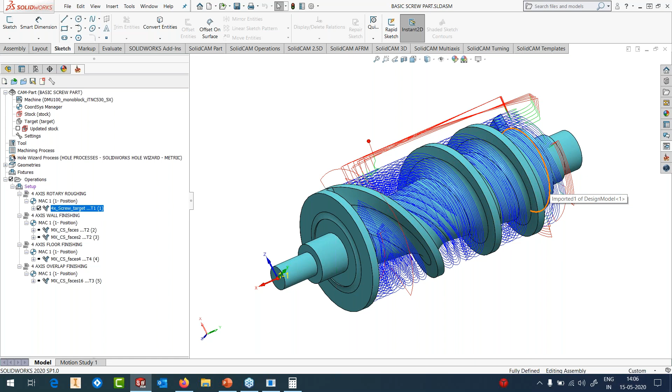For example, if I have a screw machining strategy, I cannot take an impeller input and ask it to calculate. It will not do it, okay? Because it is expecting a different kind of a geometry. Similarly, inside an impeller, I cannot take a screw and put it and ask it to machine. It will not, okay? So these are the limitations. So that's the first roughing. I simply selected the part, I selected the tool, depth of cut, side step, and my roughing was done.

In finishing, I'm using, again, the generic 5-axis, which is the multi-axis constant step over. And I've selected the faces to finish. So if I look at the faces here, these are the faces that I would like to finish. Simple. And let's calculate. I'm just going to calculate only one of them and show very quickly how we do it, because everything else is similar.

Somebody asked a very valid point, and I believe this was never asked before - I really have to check this. This could be checked from 2 different sources: the tooling manufacturers themselves, as well as our software developers. The question is whether we maintain a constant VC when we are going on that surface with a different contact point. Very valid question.

It's like turning, okay? It's like turning where you have a constant surface speed, so the RPM varies. When you start from a bigger diameter and go to the tip, the RPM varies. Similarly, you should have a different RPM for every cut that you take, because your contact point here is varying, so is the diameter. But what I have seen specifically in the catalog of Emuge is...

They ask you to use a particular contact diameter, and they generate the parameters for that particular contact diameter. You could call it the mean diameter, between the lowest and the biggest, and they ask you to use the parameters for that particular diameter. So this question, I have to put to the tooling manufacturers as well as the software developers to see what we can do. But at the moment, it's going to be constant VC throughout.

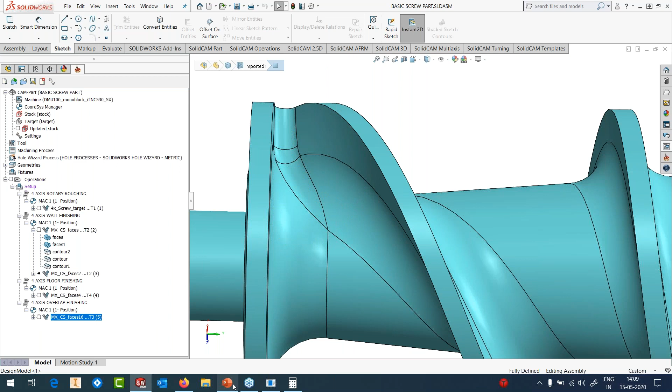Right, so that's about it, very quickly. Let's move ahead to the next one. We are now entering the most important aspect of our application-based approach, and that's the impeller or blisk machining strategies.

Okay, I'm going to quickly run through the impeller machining. Let's open a part - not a simple part, but a pretty complex one. Multi-blade. Take the impeller. So I have a nice impeller here with pretty thin blades and very little area to work with.

And in impeller machining of SolidCAM, if I edit this toolpath, you see that we have got roughing, blade finishing, hub finishing, and fillet finishing strategies. So the first one that we are going to use is the roughing.

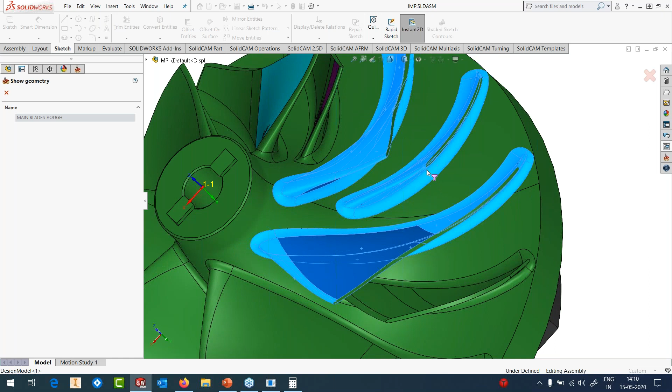So what I have here is in the geometry, I've got - not the new, but I would like to show what has been picked. So I'll go here, show. So what I've done here is I've picked a group of 2 main blades and 1 splitter blade, including the fillets. Very important - fillets must also be included as part of the blade geometry. So 2 main blades and 1 splitter blade is selected.

And I've also selected 1 piece of the bottom surface as my hub. Okay, you don't have to select everything, it's not needed. SolidCAM just expects 1 small piece so that it knows exactly how the hub is. Internally, it will do its own calculation of the surface.

Okay, and what else? I have done 2 roughings here, one with a short tool with diameter 10, because it can really rip the material even at a depth of cut of 10 millimeters, and it can machine the part. So it's a diameter 10 with a corner radius 2, taper ball nose. And here in the distance, that's the depth of cut - 10 millimeters, and the side step is only 0.8.

And I'm going to go - you can see that there's nothing, most of the things are automatic or they have been set default by the system. Okay, all you need to do now is simply hit the calculate button.

Okay, that's done in under 10 seconds. It calculates. Because I've just said do 1 blade, it has done only 1 blade, and it has gone up to here because that's up to where the tool can reach. Beyond that, it's actually going to create a collision between the holder and the tool.

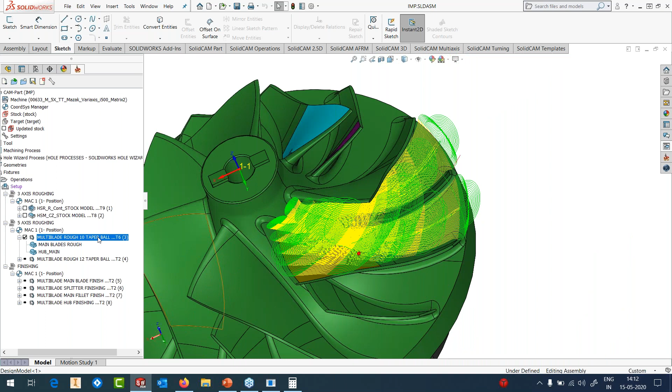So the tool path is stopped out there. Okay, so that's how my roughing looks like. So if I run the simulation and SolidVerify, it'll probably run the calculation of the previous operations.

Okay, that was my first stock, and that's the zero clamping fixture that I've used to clamp the part, and I can stop the machining.

Let's switch off the holder for a moment, and that's how it will cut.

10mm at every depth. Okay, so it'll keep opening 10mm, 10mm, and 10mm.

I can actually show you a photograph of how the part looks like on the machine when this roughing has been done. So as it reaches the splitter, you can see that now it isolates into two regions, one is the left region and the right region. So it roughs out the left region, then goes again into the main region, into the right region basically, and starts cutting.

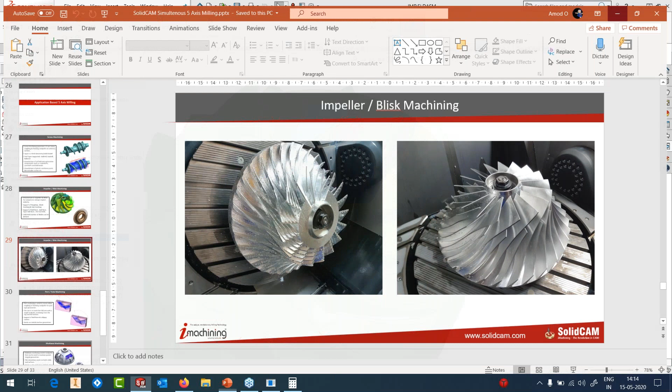Okay, so like I said, I can edit this part. Since I have done only one, I can go into my transformation and I say machine all of these blades.

Somebody's asking if we can use plunge milling strategy to machine it faster. Yes, of course you can do that. In fact, I would suggest that you go not with 5-axis roughing, but with just plain 3+2, the automatic 3+2 functionality, and it will do it even faster. Or you could use the iMachining functionality in 3+2, and it will do the machining even faster, because anyway we are cutting aluminum in this, so it's going to be even more faster.

Right, so that's how it generates the toolpath for all the other 7 segments. Whatever remains now will be done using a 12 diameter taper ball nose. This is a lengthier tool, a slender tool, so here I cannot go with a bigger depth of cut. I'll go with a smaller depth of cut, but not 1 millimeter. It's going to be about 2-3 millimeters, and the remaining areas are going to be machined using this particular tool.

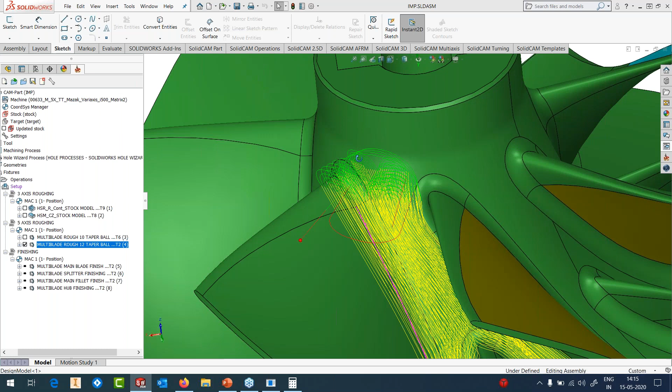Okay, so this region is now roughed out. Perfect. Now what remains is basically semi-finishing or finishing the blades. They are both the same. So I've got the blade finishing function here.

I just have to select one set of blade. So if I go into the geometry here, if I show you the geometry, I just select one set of the blade, including the fillets. Let's calculate. And what I have here is the tool axis control.

Everything is automatic. And the parameters, I'm using 1 millimeter step down, machining full. Because this particular impeller also has a radius towards the trailing edge side, I cannot stop it here. I'll have to roll my tool around this fillet here. Okay, so let's hit the calculate button.

Somebody's asking what kind of parameters to be taken into account when you're machining such parts. First of all, you have to really listen to your tooling people. They know much better when they are handling such parts. So the RPM, feed rates, depth of cut, and side step need to be taken. And please use specialist people who know what impellers are, and not somebody who just sells solid carbide end mills.

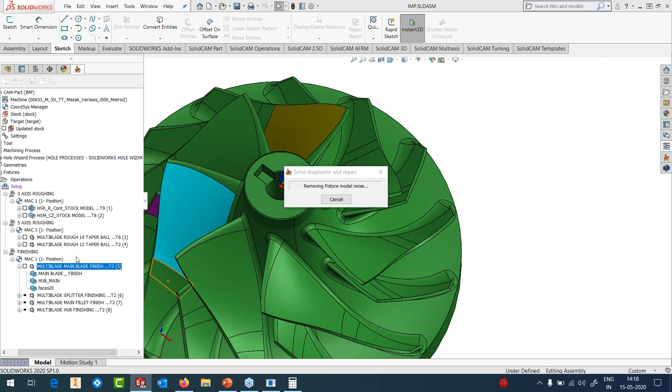It's simply running like a spiral, starting from the edge, from the start, and going all the way down. So if I run the simulation, the finishing can be done in two ways: using multiple cuts, or you could do a swarfing with a single pass. But in the majority of cases, impeller surfaces are not classic or ideal for doing swarfing.

I'll have to shut this. I thought it would stop, but it didn't. It's continuing, and it's going to take a long time if it does that. Okay, let's reload the part.

Again, some people have asked a very valid question on impellers, I think, because they've had this experience of buckling of the blades, especially after you've done the finishing. When you remove the part, put it on the surface plate and allow it to age for, let's say, a day, and then take it to the CMM, it shows a completely different picture of the blade. The blades would have buckled.

The most important thing here is going in stages. You don't machine right from top to end in one go. You will machine in stages, especially after roughing. We generally recommend aging the part—some people don't do that, but we recommend it—because roughing is a really stressful process and it induces a lot of stresses.

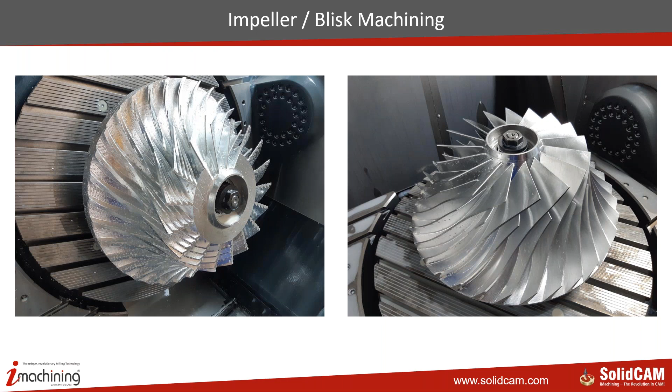And here also we did it in stages. We allowed it to age. In fact, we roughed it completely for one full day and left it overnight. We allowed it to age, came in the morning, and then just finished the part. Many people won't agree, but there are other ways of doing it.

Okay, so let's also calculate the splitter, which is basically the same functionality as the main blade. We have selected the splitter blades with the fillet.

Yes, somebody is saying that the depth of cut causes buckling. Of course it does. That's why I said you need to get in touch with the tooling experts who precisely know these problems, and they will suggest the particular parameters. In fact, the parameters we wanted to use for the impeller I showed you were overruled by the tooling guys—they gave us a completely different set of parameters. So you have to really use those parameters.

I wouldn't say you will have no buckling or warping at all—there is going to be warping—but it's going to be bare minimum when you follow the process suggested by the tooling people, especially the parameters. Okay, so that's the splitter.

Now, if you look at the fillet, it's not a constant fillet, it's a variable fillet. So I have to finish the fillets, otherwise this part is going to look really ugly. So we have a function to actually finish the fillets, called fillet finishing, where it provides some passes from the blade side, some passes from the hub side, and they merge together to finish the fillets.

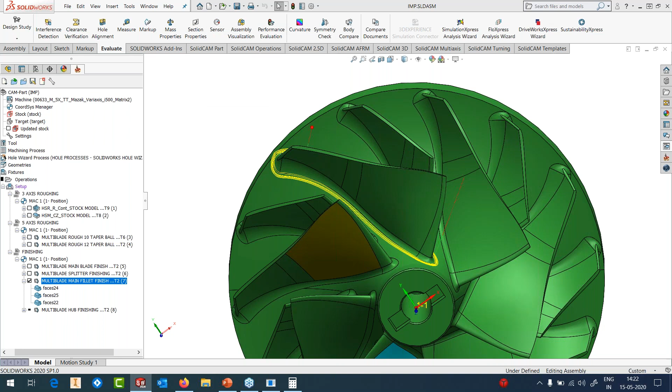Okay, so that's the fillet. It's going to move around the fillet and finish it. I've given a large step over here, but you could give a smaller step over to machine the fillets. It will just keep spiraling around the entire fillet and machine it.

Once that is done, we go down to the hub, because we also have to finish the hub. Although I've seen people like to do some kind of polishing finish on the hub, you don't need that kind. A rough finish is good enough for the hub because that's not the main area—the main area is the blade itself.

Okay, so we have hub finishing here, and I've given a step over of 1 millimeter with the same tool I used for finishing—12 millimeter with a tip radius of 2. Let's hit the calculate button. Again, it's going to be pretty quick; it doesn't take much time to calculate. That's the advantage with application-based strategies. Okay, hub is also done.

How much stock should be kept for finishing? Well, it depends on the geometry. This particular part, we did at the IMTEX exhibition last year, and we almost did one impeller per day across all 7 days. We kept a stock of about 0.7 for finishing, and that was good enough to finish this. It was machined on a Hurco VMX10i, a 5-axis machine, small machine, because the impeller itself was also small, just 250 diameter. So that's about the impeller.

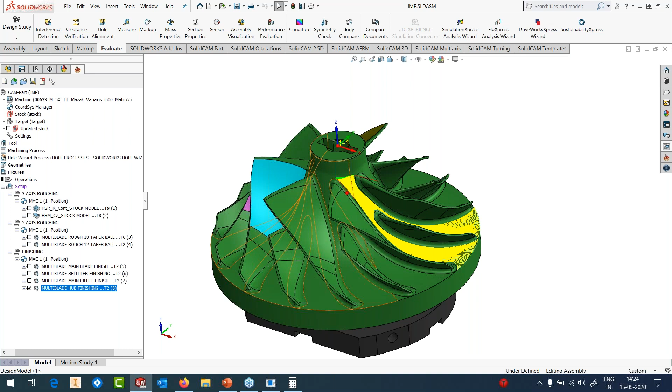The other one is a blisk. I'd like to take a blisk, and for the blisk, I have already defined the process. I'm using a combination of generic 5-axis as well as multi-blade. You can do a lot of things with SolidCAM. For example, I would like to rough the blisk, and I can rough it even without using the multi-blade functionality. I'll use a bullnose and just scoop the material out in 5-axis between these 2 blades.

So I've got the blisk roughing, let me calculate that. It's a generic 5-axis functionality, basically a parallel to surface functionality where we've selected the entire blade without the fillet and the bottom surface, and that's it. That's all that is needed. Select tool, give the depth, give the side step, and we come up with a very nice toolpath for roughing. That's it. So we've roughed out using the tool you can see.

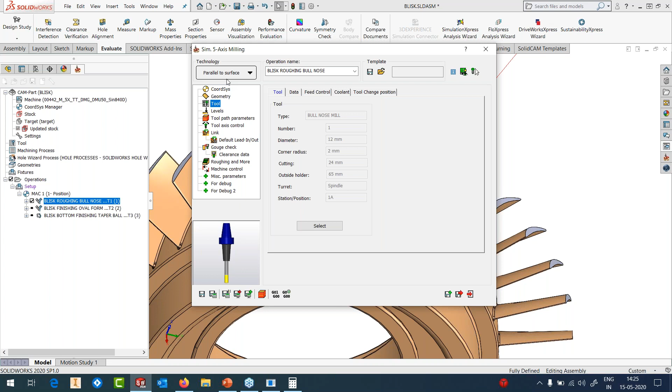I'm using a 12 corner radius 2, a bullnose, with the parallel to surface function. This is a generic functionality, not something application based. We don't have a special function for machining a blisk. You can just use simple application-generic functions to machine anything the way you want. The only thing we've done here is use a function called area roughing to generate the roughing passes in between, and I've used a simple bullnose to machine it.

Of course, I can even rotate this entire toolpath. There are 34 of them, so let's run the calculation again. Okay, it's almost done, it's now providing the links to all those 34 areas that it has generated. Done. The calculation time was approximately 23 seconds.

So that's the blisk roughing using simple generic functions. Also, you can use oval form tools to finish this. What I've done here is again a generic 5-axis functionality, using the blisk with the morph between 2 curves functionality. I've used a 10 millimeter tool with a tip radius of 2R and a large radius of 85R.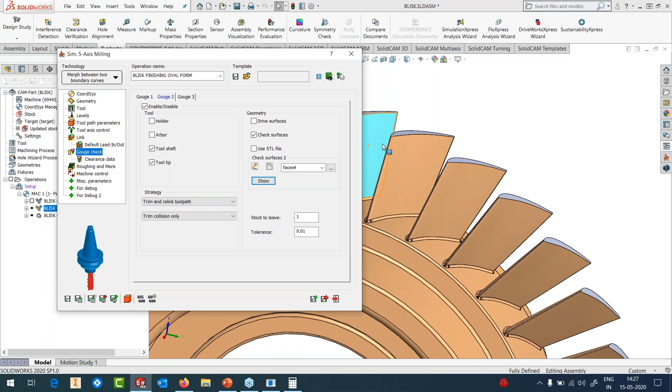In the tool axis control, I've set it to start at 50% and go down to touch up to 20%, stopping exactly at these surfaces, 1 millimeter above. Whatever area remains unmachined is due to the limitation of the tool itself. Some area will remain, it will be unmachined, and that you can finish using a taper ball nose or a ball nose tool. So let's run the calculation.

Okay, that's done. Some people were asking why we can't use the plunging pattern, but the plunging pattern is available here - we've got it, and we can use it also. What I showed you as simple 5-axis roughing, we can use a plunging pattern here. So this is how my toolpath would have looked like if I'd used the oval form tool. I'll run the simulation.

My first contact, you can see, is at 50% of the barrel profile. My last contact will be somewhere here because it can't go all the way down, otherwise it would create a collision with the bottom surface. Let's run the simulation here. It's a nice spiral toolpath, continuously changing the contact point.

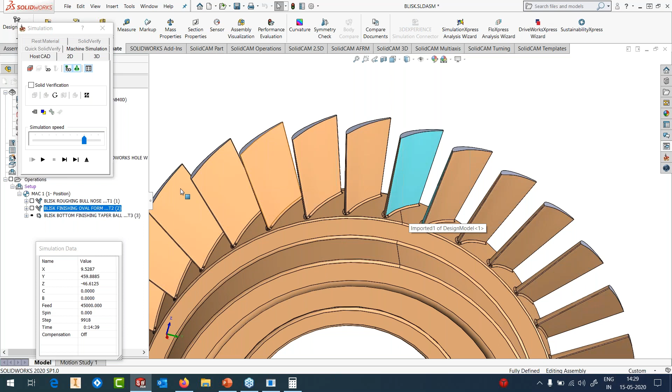Okay, let's look at this contact point here. I'm going to switch off the toolpath. You can see that my contact point is somewhere here down. If it comes here, my contact point has now changed, so it keeps changing the contact point. Once it comes 1 millimeter close to the bottom surface, it will stop the toolpath, trim it, and retract. Whatever remains can then be used or done using the generic function or the blade finishing function.

Here what I've done is I've selected the entire blade, but the area has been controlled by defining the percentage. It starts from 85% and goes to 100%. That's it, simple. It's a no-brainer here.

So you can actually make a combination between generic and the other machining. That's how it is done. If I run the simulation, of course, I have not given any holder here, and that's how it will machine it.

So the remaining area gets machined with the ball nose. Okay, right, let's jump to the last two, basically.

I'm going to go into what we call multi-axis roughing, and let's open a part, especially for arbitrary roughing in 5-axis. So I have a part like this. It's pretty large diameter - if I measure it, that's about 800 millimeters in diameter, and I have pockets on the side, and I would like to rough them out.

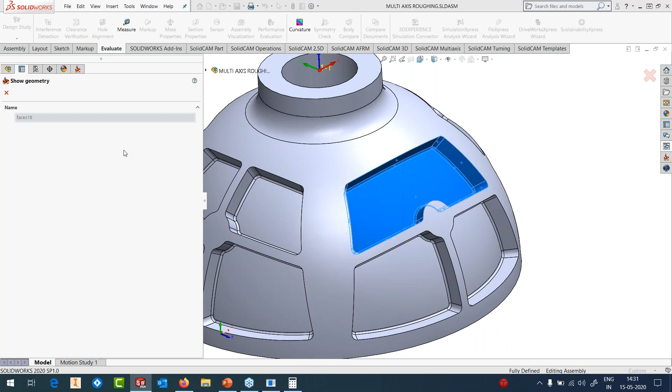Of course I can use 3+2, but I also have a possibility to use 5-axis roughing. So what I have here is I have defined my floor - the floor surface needs to be defined. I need to define the wall surface, which can also include the floor surface, but the software is pretty intelligent. It will isolate the floor area and only keep the wall area and machine only the wall area.

And the method that I've used here is called contour. It's like simple 3-axis roughing for molds - outside to in, inside to out. That's the method I've used. The tool here is a 16 corner radius, it's a bullnose R2. In the toolpath parameters, my depth of cut is 3 millimeters, my step over is 10 millimeters, and tolerance is about 0.1.

And we are using one-way machining by regions. You can see it looks very similar to 3-axis, but the output that it generates is going to be full 5-axis. So let's calculate this.

Okay, this is done. Let's look at how this looks on the machine. Let's put the simulate, take it to the machine.

And it works basically on updated stock, so the stock definition is a must. It has to know where the stock is before it actually starts the calculation. Okay, so I have got the part, the tool, everything, and can start the simulation.

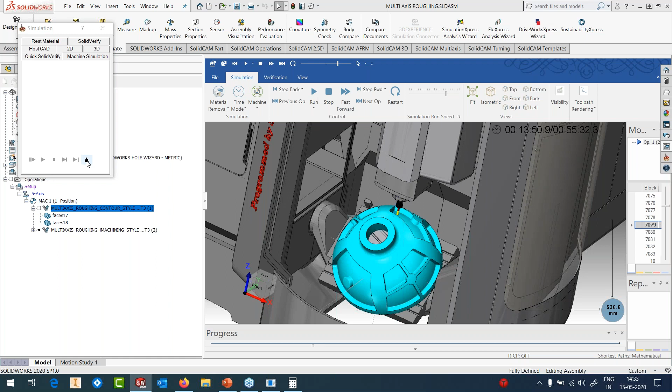Okay, this is one way of cutting it. Another way is to use what we call iMachining style, which ensures consistent engagement on the tool. And let's see - this area is suitable for it. We have roughed out this area, but the thing here with the iMachining is that I can use full flute length of the tool to generate parts.

Done calculating, and you can see this is the iMachining strategy - looks very similar to the other machining. So if I now take this input for simulation, it will look like...

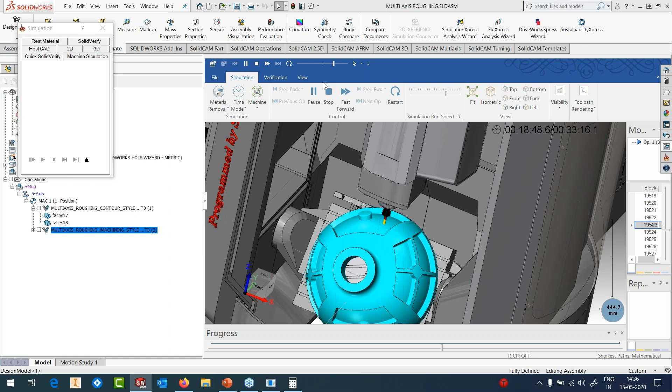We have got roughing, plunge. So we can apply any of these functions. Let's go for rough, and let me show the faces selected. All these inner faces are selected as my machining faces. Okay, right. And the tool selected: you can use a ball nose tool here or a lollipop. We have selected a lollipop tool here.

Toolpath parameters: my step is 5 millimeters, step down is 3 millimeters, and I'd like to machine both sides, maximum from this side to go all the way up to wherever it can. The remaining region is machined, it retracts and machines from the other side. So let's save it and

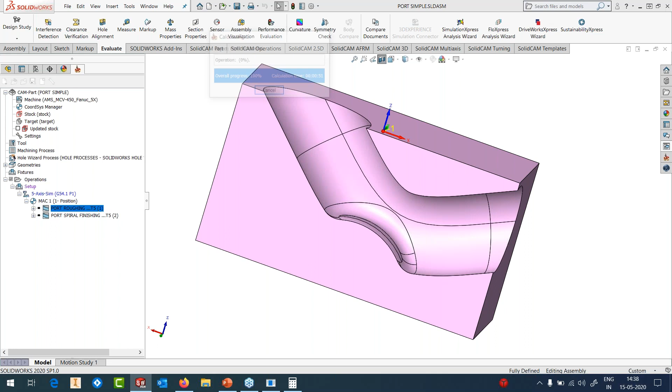you can see it only started from one side and it goes all the way up to here, to the maximum point possible, and for the remaining it comes, retracts, and starts machining from this side. So if you look at the simulation, let's go to the solid verify sim. Let's set the region of interest. Start.

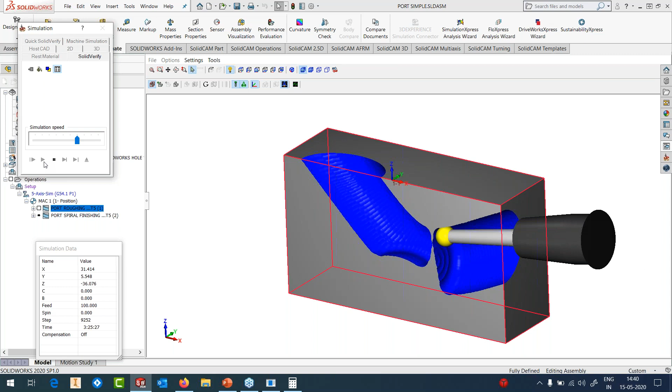It also takes into account, remember, the holder. It's taking into account holder collisions inside the tube. It's gone all the way to the extent possible. Where that is not possible, it retracts, comes to the other side and starts machining the part. So you can see that it's roughed out the sides of the tube.

The finish works similarly. I selected the same here, and I'm going to use the spiral finishing with the same tool, so you can just hit the button.

Someone is asking if we can pre-drill in the tube. You can. Once you pre-drill, it will understand that the drill has happened. It will take the updated stock and it will not machine the area that is already machined. This is to run the finish.

Let's run the simulation. Let's start. It's doing 3 axes, and the moment 3 axes is not possible it's tilting, and it starts machining after it tilts. It takes the holder also into account, and where it's not possible it machines from the bottom side. Done.

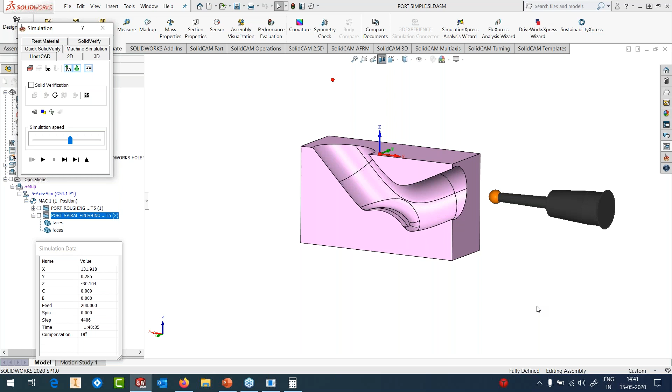So this is what customers use for machining ports. They're also machining tubes in aerospace. So pretty powerful function.

The last portion of our webinar, and that's the drilling. So I'll open the part here, and it has got holes on every side, every possible side. So I have to create drilling programs without having the need for any kind of manual setup. I need to create programs for this.

So go into operations, multiaxis drilling, tool, and I'll create a drill. The total length itself is 60, out of which only 30 millimeters is flute, and I'll define a holder to it so that we can check collision. Okay, I've created that. That's how my drill looks with the holder and the tool.

Let's go into the geometry and I'll say new drilling geometry. In the drilling, you can ask for a through hole or a blind hole. You can ask to pick a certain diameter, find only those diameter holes. Or I could say the hole depth from 0 to minus 25. Any holes that have got this depth, please only pick those holes.

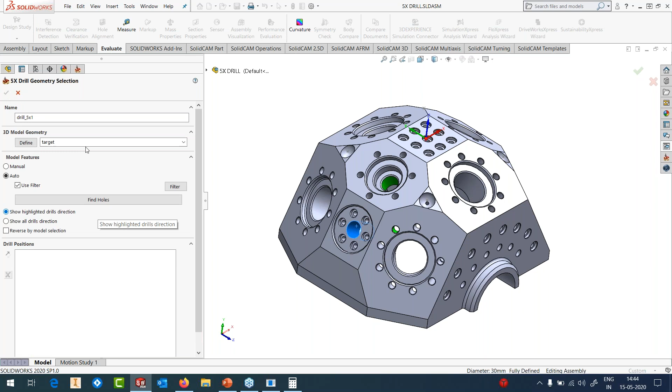So you can see also, oops, one of them, this one, this hole, is problematic. So it is now isolated for me here. This is the hole. Yeah, this hole. So I remove this hole. I don't want this. Other holes, I will select.

Okay. The tool is already selected. You can see it's automatic. The depth of the hole is also set automatically. You can edit: go into the depth edit and you can edit the depth of that group. I want to go with the entire depth possible. In the technology, the first one is sorting, picked on its own.

So I will go to the shortest possible distance and show me the sorting. Now this is much more human, much better.

You can set into the pattern, you can set this pattern. For example, if I set this pattern and say show sorted, it will show me how it has happened. Then I could go into a certain pattern. Patterns are available, you can select each pattern and it will show you the sort.

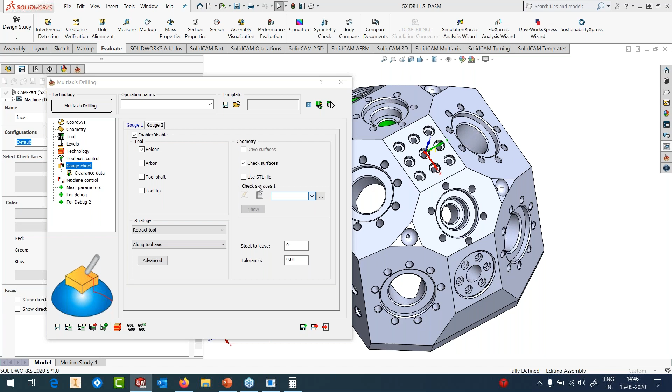Okay, done. Now use the automatic clearance plane to the point. I'll edit that, and I'll say use sphere of radius 250. The Z is -225, let's see if the value holds true. Safety distance, retract distance, 10 mm each. Let's calculate.

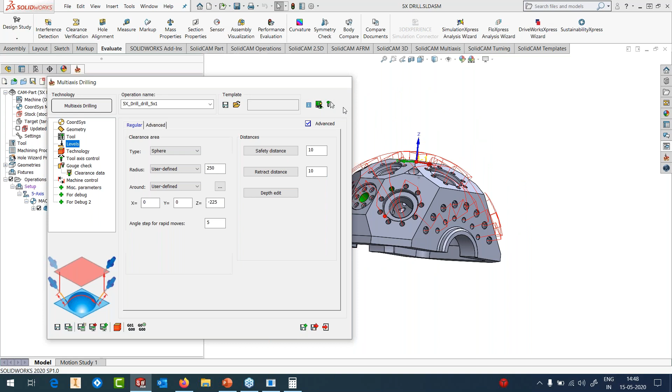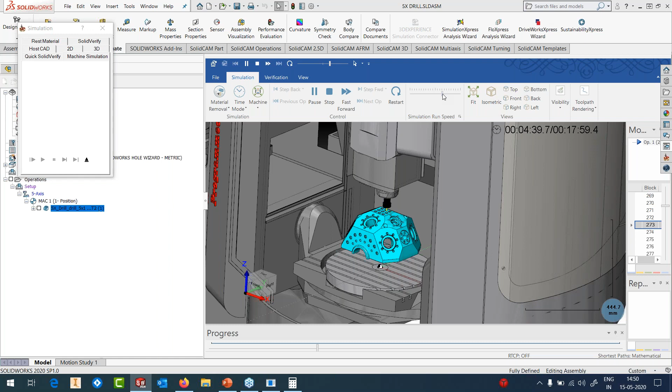A particular plane. Again, the plane changes, and the cycle is called again here. Okay, so we are now using the cycles for our drilling.

You can also just go here into the function. Look, machine doesn't support cycles, so I'll say don't use cycles. Run the calculation, generate the G code. No longer cycles, it's all XYZ, XYZ, XYZ. So simple mimicking of the cycle using the G1 method of SolidCAM.

Okay, this is how we do multi-axis. I think we have almost everything that's available in SolidCAM 5-axis today.